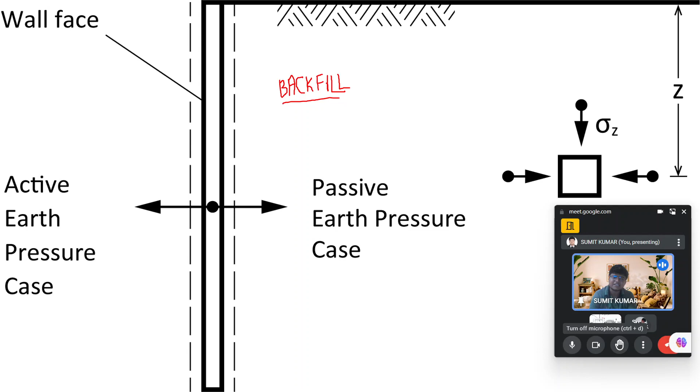This is very easy and doesn't need to be repeated, but it's a basic concept, so I think it's worth discussing again for better understanding of the subject. So these things are very simple: Sigma A equals k times sigma z minus 2c root k.

Now your question is, what is sigma z? Sigma z is the effective stress at depth z, and the effective stress concept you've read during Geotechnical Engineering 1, that is nothing but gamma times the depth of the soil.

When we are talking about effective stress, the location of the water table is also one of the most important aspects, because it will create differences in the soil that we need to deal with.

Suppose we are calculating the earth pressure at depth 6 meters from the ground floor, and the water table lies at 4 meters. In that case, when we calculate the earth pressure coefficient at 6 meters, suppose it will be 1 by 3, so the sigma z value will be multiplied in the effective term.

So we take gamma, we calculate sigma z as: suppose the unit weight above the backfill, the gamma bulk, is 18 above the water table, and below the water table, the gamma saturated will be 21. So how do we calculate this?

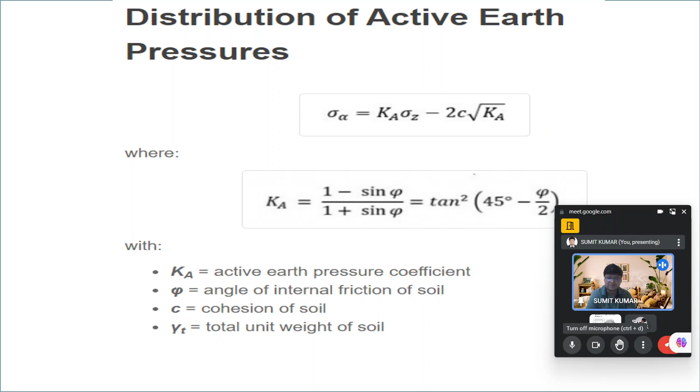Now the earth pressure coefficient I am talking about is 1 minus sin phi by 1 plus sin phi, and similarly for the passive case, 1 plus sin phi by 1 minus sin phi. That's not a big deal, it's well understood by you.

So the QS surcharge I am talking about will be mentioned here, as I have already discussed. Similarly, for the passive earth pressure, Kp times sigma z plus 2c root Kp, where Kp is 1 plus sin phi by 1 minus sin phi, which equals tan square of 45 plus phi by 2.

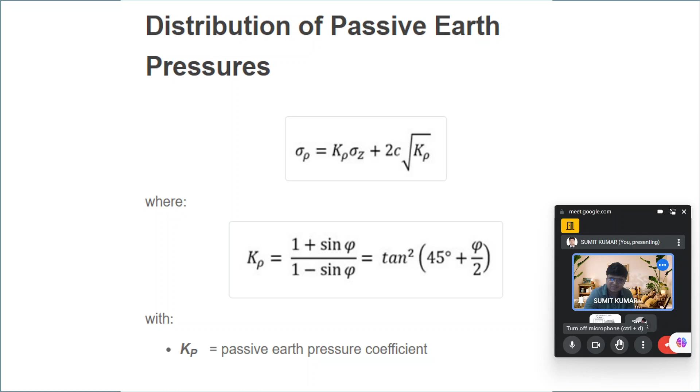When we talk about K, that is tan square of (45 minus phi/2), but that's not the only case. It can also be written as (1 minus sin phi)/(1 plus sin phi), equal to cot square (45 plus phi/2). This is purely a trigonometric result: when you solve (1 plus sin phi)/(1 minus sin phi) trigonometrically, you ultimately get tan square (45 plus phi/2), and the converse is also true.

We also covered the inclined backfill and solved a good problem where the backfill inclination beta was given, calculating the earth pressure coefficient. We still need to calculate the passive earth pressure coefficient, which will be taken up in the last session. That problem helped us understand how the backfill slope is specified and how to calculate results correctly.

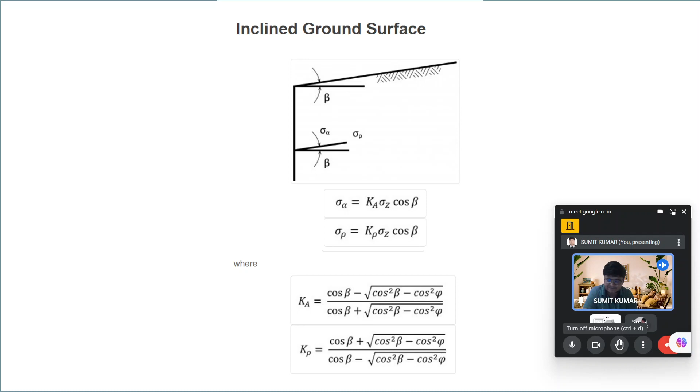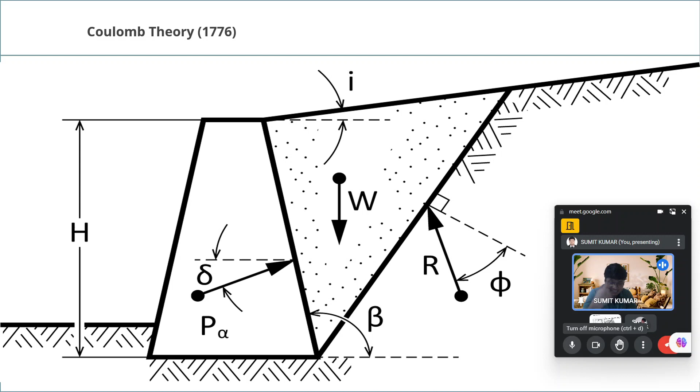In the previous class we covered Coulomb's theory, took its assumptions, and developed the interrelations showing how to calculate those values. That's as far as I want to go in revising the last class's content. That part is not of much importance for this session, so now I will move on to the new content.

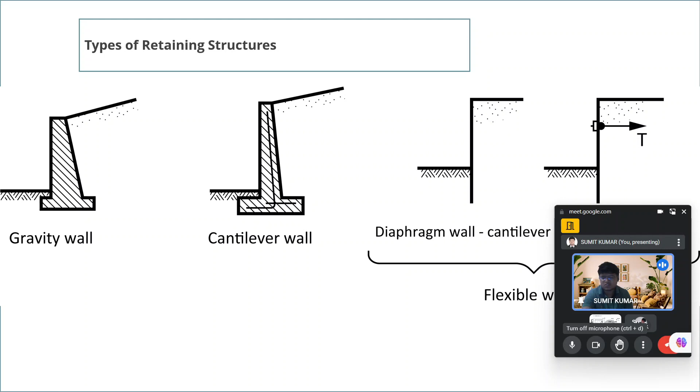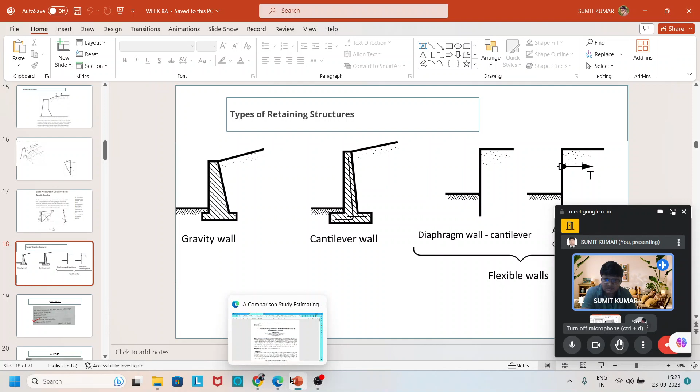For types of retaining walls, we discussed gravity, cantilever, and diaphragm walls. That concludes the revision from the last class. Now I will start with new content which will be very helpful for you from today's session. Give me a minute to share that content with you.

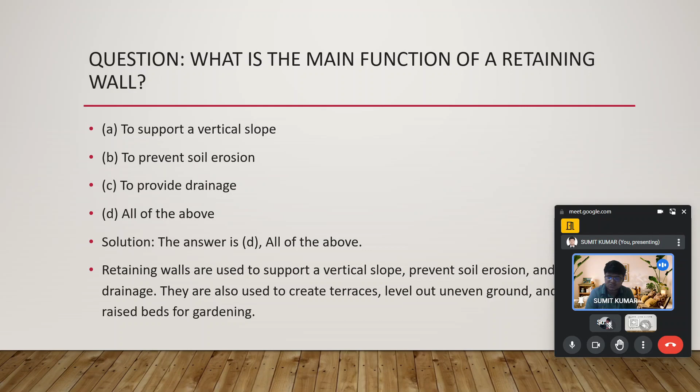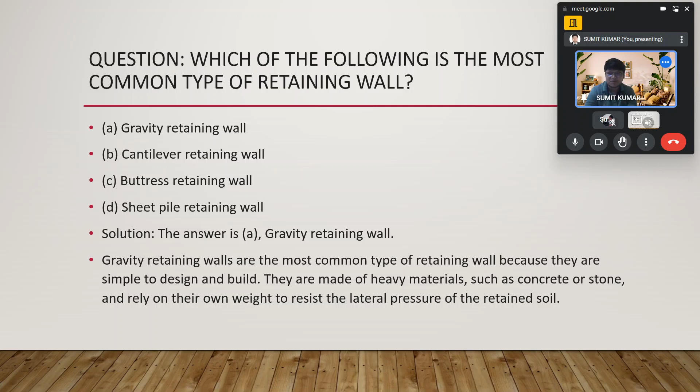Okay, so read the next question and try to answer. In the meanwhile, I will take some water.

Okay, so have you read the problem? Okay, no problem, I will read. So the question here is: what is the main function of a retaining wall? Again, the four same solution problem will be there. I think due to some technical error, the same question has been repeated.

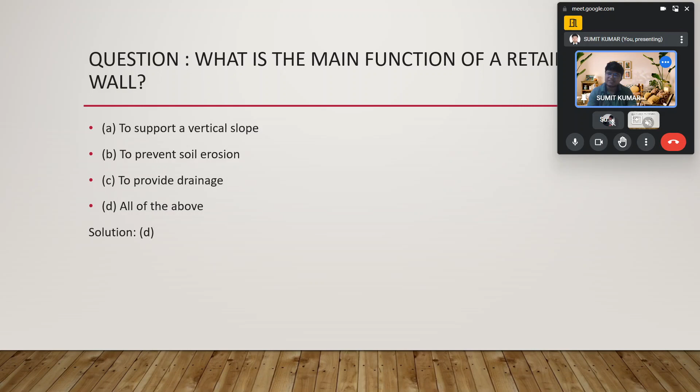So, to support the slope, to support the vertical slope, to prevent the soil erosion, and to provide the drainage - all the options given here are correct. This question already came two slides earlier, but due to some reasons it came again.

Again, which of the following is the most common type of retaining wall? Gravity retaining wall - it is only for revision. This has been repeated in a different manner.

If we are talking about that fact, then another question comes to mind: for what purpose is the retaining wall we are constructing? Are we trying to resist the soil from moving, prevent erosion, or are we storing water behind it? Because the pressure acting on a retaining wall due to soil and due to water pressure will be completely different. Those two things don't go hand in hand. So that will be well understood by you. I think that is not a concern from anyone's side.

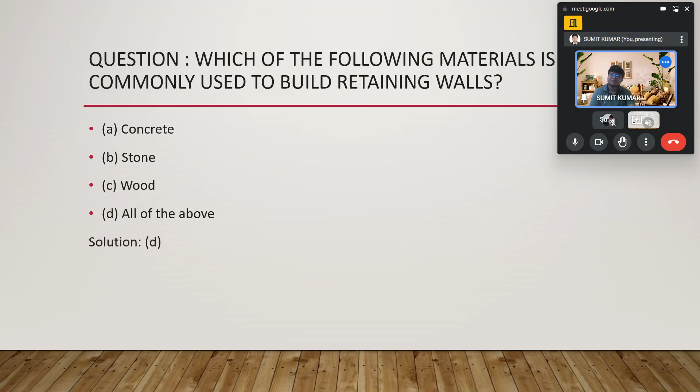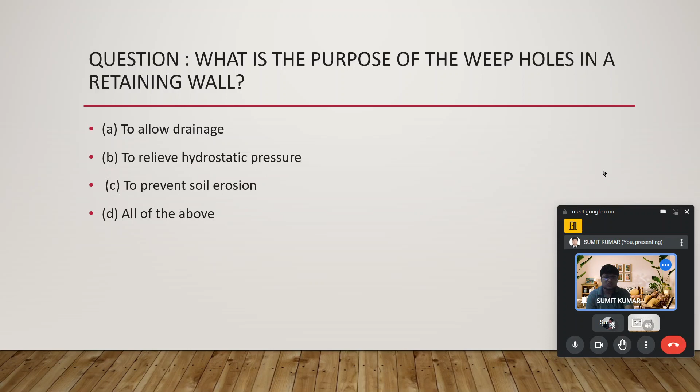Okay, moving ahead, the next question raised here is: what is the purpose of the weep hole in a retaining wall? This question is new for you, I think, since it wasn't discussed during this session. But I put some problems like this in the presentation to give you facts you may not be aware of, which you'll understand well after this. So the question is, what is the purpose of weep holes in a retaining wall? Is it to allow drainage, to relieve hydrostatic pressure, to prevent soil erosion, or all of the above?

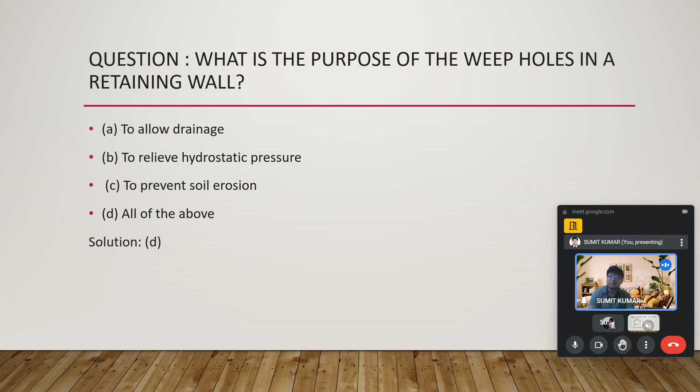To allow drainage and to relieve hydrostatic pressure go hand in hand, and preventing soil erosion is also why we provide weep holes. So the solution is yes, all the options provided are true. I actually put options that are all correct to give you a broader understanding. If only one option were correct, you'd never understand the other three. But going through this question, you'll have confidence that these are all true solutions, rather than thinking the others are incorrect. So you can answer this if the same problem is asked differently at other places. I think this will be understood well by all of you.

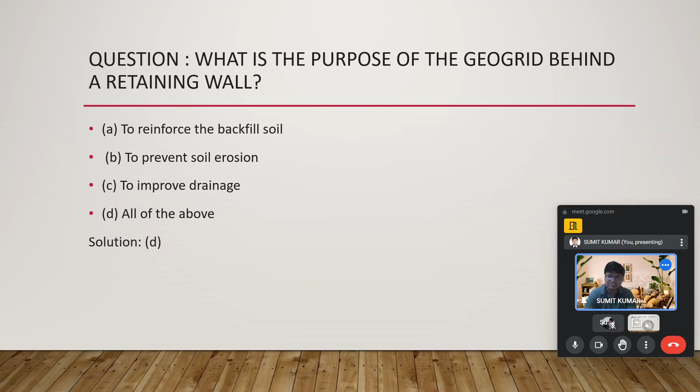Now, what's the next question? What is the most common cause of retaining wall failure? Failure does take place—it's not that once we construct a structure it never fails. But it's our duty as engineers to design structures in the most efficient way, because failure of any structure can result in a big disaster, which cannot be accepted in any way. So the design should be most appropriate, but even so, failures do take place.

If effective stress gets reduced, the strength ultimately goes downwards. That will not be good in any way, so it may lead to failure.

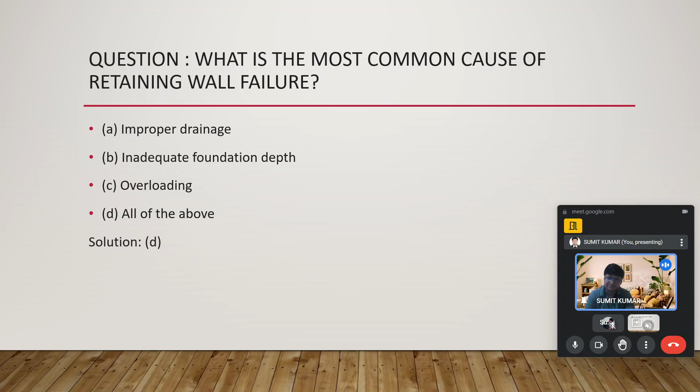So, what did you understand from this problem? The cause of failure could be improper drainage, inadequate foundation depth, and overloading. I think up to this there will be no problems with anyone. We will move ahead.

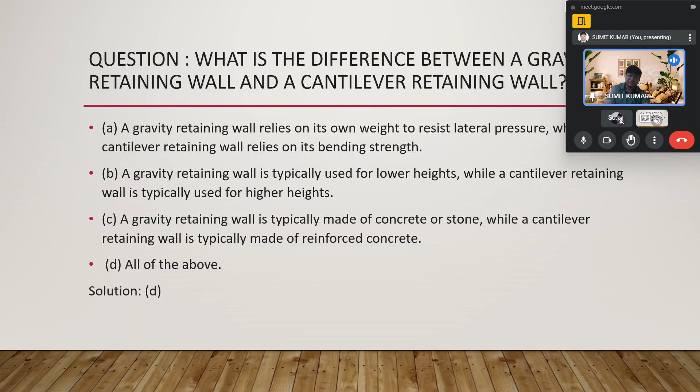So option number D is going to be our correct answer. I think the things are very much clear.

Now the next problem is in front of us: what is the difference between a buttress retaining wall and a sheet pile retaining wall.

During the starting session, you have seen all the retaining wall images, and now we are coming across its application with its name, so one can understand the fact about this.

The question is: what is the difference between a buttress retaining wall and a sheet pile retaining wall? In the last problem, we read the difference between the gravity retaining wall and cantilever retaining wall. This could be one problem. All the options are correct, so three solutions are provided.

The three differences are stated over here. Similarly, with every problem from earlier as well, the solutions are stated. All the above options are mostly correct, so three solutions are provided. Basically, three questions could be framed from the same aspects, but only one question is framed to give you more knowledge in less time.

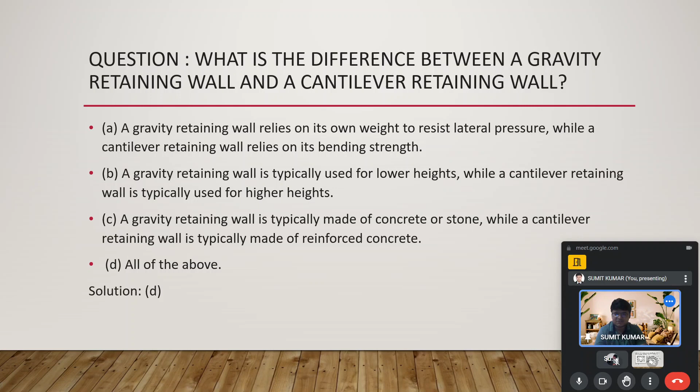So what is the difference between the buttress retaining wall and a sheet pile retaining wall? Option A: a buttress retaining wall has a vertical buttress that supports the wall, while a sheet pile retaining wall is made of interlocked metal sheets.

Exactly, it is true. A buttress retaining wall is typically used for higher heights, and a sheet pile retaining wall is typically used for lower heights.

Now, a buttress retaining wall is typically made up of concrete or stone, while a sheet pile retaining wall is typically made up of metals. So option D is going to be our correct answer.

So over here as well, you find the three differences between the buttress retaining wall and the sheet pile retaining wall. You need to understand this fact. You have to preserve this question and prepare it as a solution covering three problems. The same problem could be asked from three directions and it will ultimately state the same result. So these things you need to understand.

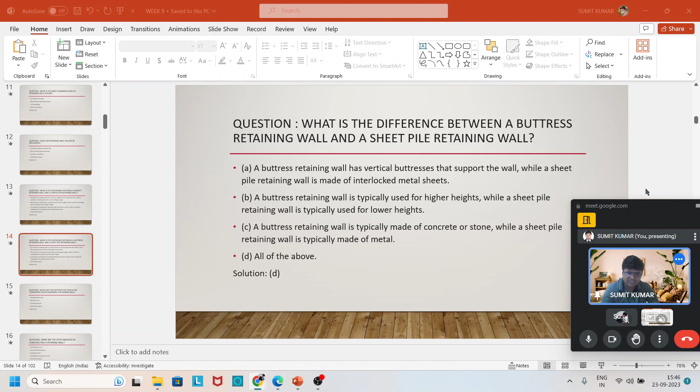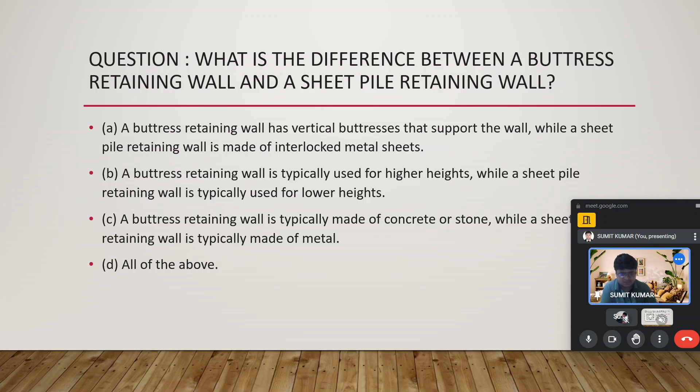Okay, so you have the solution for this problem stated. Now prepare these questions - you can write it in these notes as well as differently.

Now the question is: what are the factors that should be considered when designing a retaining wall? The height of the wall is a factor. Obviously, the type of soil, surcharge load, or all of the above are the options for this. The height of the wall is one of the most important considerations while designing a retaining wall.

Second, the type of soil is also important - whether the soil is cohesive or cohesionless, whether the soil has plasticity property. Those facts need to be reviewed.

Now the third thing is the surcharge load - the load which has been applied there during construction or before construction, or the superstructure load which will be coming over there throughout the region. So all those factors become the most important considerations during the design of a retaining wall.

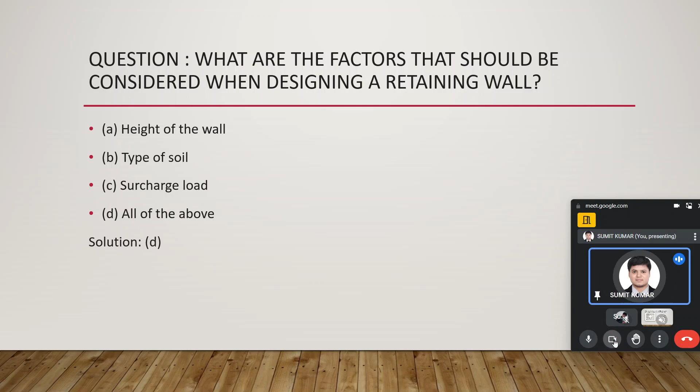Now we come to the next question. The next question is: what are the types of maintenance that should be performed on a retaining wall? This could be asked in a different manner as well, but what should be the correct answer?

Inspecting the wall for cracks and other damage, repairing any damage that is found, cleaning and removing debris from the wall - all of the above. So what are the types of maintenance? Inspecting the wall for cracks and other damage, I think so.

Repairing any damage that is found is obviously one of the most important aspects, along with cleaning and removing debris from the wall, for the maintenance of the retaining wall at any workplace.

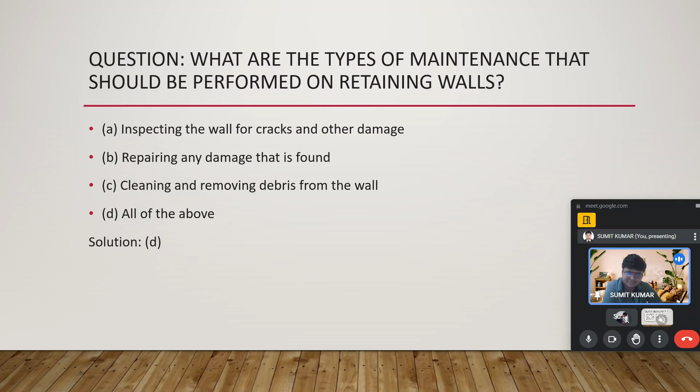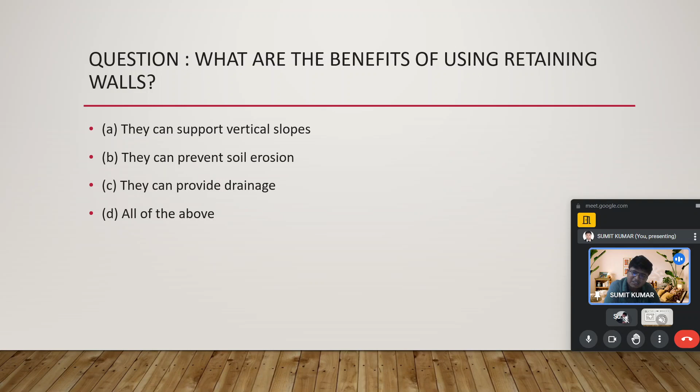So we have ended up with the questions, the simple theoretical questions. Now we will go with some numerical problems, very simple small numerical problems, and afterward hopefully we could understand the sheet pile wall up to an extent during today's session only.

So the question is: a retaining wall is 3 meter high and retains soil with a unit weight of 19 kilonewton per meter cube, and the angle of internal friction has been given as 30 degrees. So what will be the active earth pressure on the wall, in kilonewton per meter square?

So phi is 30 degrees already given, the value of K is going to be 1 by 3, and the question is asking for the active earth pressure on the wall. The solution is calculated using the Rankine equation, and PA is going to be 1 by 2 into gamma into h square into K, which we usually write as 1 by 2 into K into gamma h square.

So the value of K is 1 minus sin phi by 1 plus sin phi, and PA is the active earth pressure in kilonewton per meter square, similarly gamma is in kilonewton per meter cube, where the height of the wall is h meters, and the active earth pressure coefficient is K, that is the coefficient of active earth pressure.

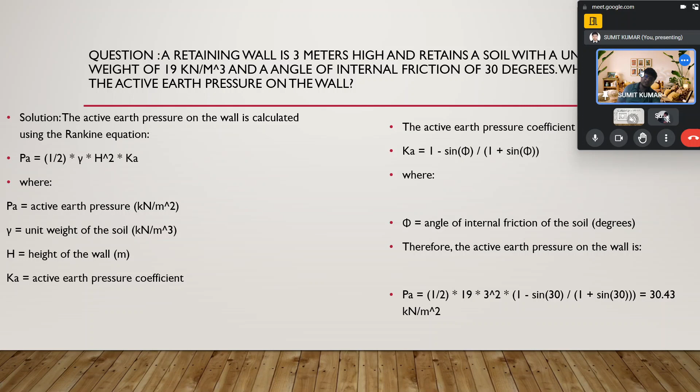So in the solution we have solved the problem and reached the conclusion that the active earth pressure is 30.43 kilonewton per meter square.

Now the second part of the problem: a sheet pile wall is 4 meter high and retains soil with a unit weight of 20 kilonewton per meter cube, and the angle of internal friction is 35 degrees. Find the passive earth pressure on the wall, which is calculated using the Rankine equation.

So PP is given as 1 by 2 into gamma into h square into Kp, and the passive earth pressure coefficient is 1 plus sin phi by 1 minus sin phi, where phi is the angle of internal friction of the soil. Therefore the passive earth pressure on the wall, PP, equals 1 by 2 into 20 into 4 square into 1 plus sin 35 by 1 minus sin 35, equals 72.1 kilonewton per meter square of pressure.

I think there will be no confusion up to this in anyone's mind.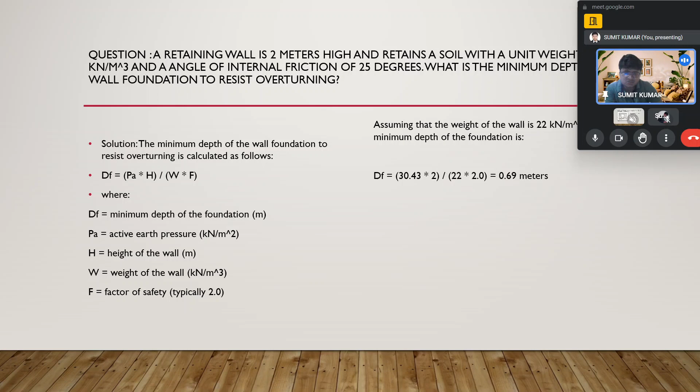The solution to this problem is dF equal to PA into H by W into F, where PA is the active earth pressure, W is the weight, and F is the factor of safety. During this calculation we are able to calculate dF. So assuming the unit weight at 22, the minimum depth has been found at 30.43 into 2 by 22 into 2, and we reach the value of 0.69 meter in this case.

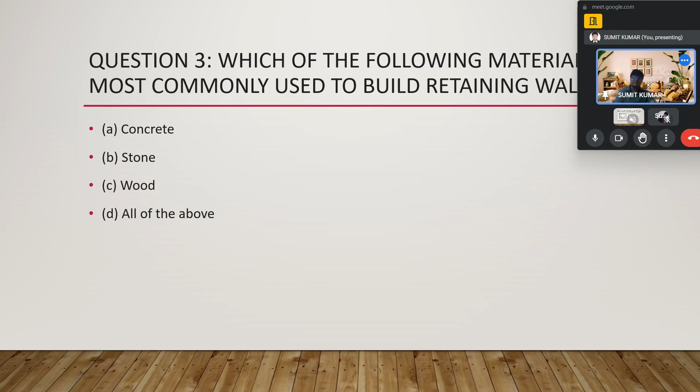Question number three has been repeated here: which of the following materials could be used to build the retaining wall? Option D is the correct answer - concrete, stone, wood, and so all of the above will be the correct answer.

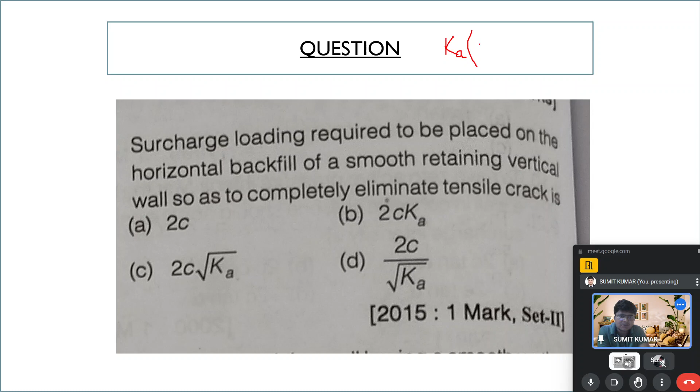Now I think there is no problem in this understanding. K gamma z plus q - because the surcharge will be multiplied with the earth pressure coefficient, as discussed at the start of today's class - minus 2c root k, minus 2c root k. This should be equal to 0.

So solving this, what we get is this will be going to be 0, because at z equal to 0, this term is going to be 0. So q will be 2c by root k. Q equal to 2c by root k. So option number D is going to be our answer - q is going to be 2c by root k. I think there will be no confusion or doubt up to this point.

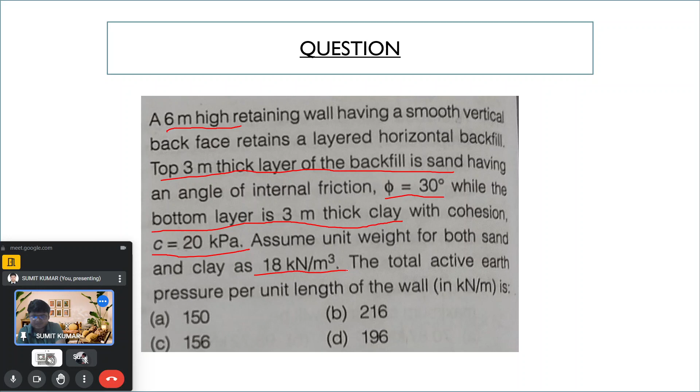In this question, first the earth pressure diagram has been drawn, and then its area has been calculated. I will explain these things to you.

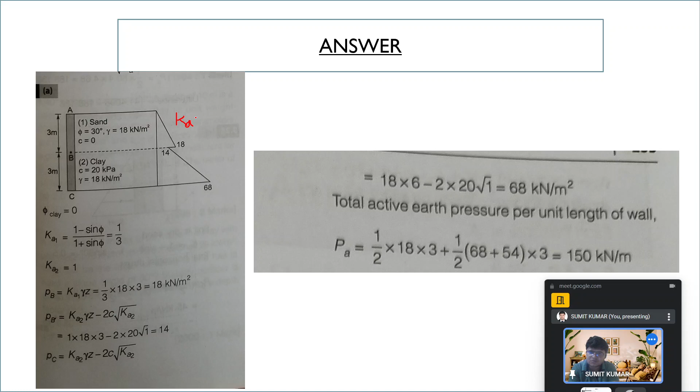For the first 3 meters, sand is there with phi equal to 30 degrees, gamma equal to 18 kilonewton per meter cube, and C equal to 0. So for this section K1 is 1 by 3, and it has also been calculated that K2 is 1 by 1.

The value of PB is K gamma Z, which comes out to 18 kilonewton per meter square. After that, for PB, K2 into gamma Z minus 2C root K2 has been calculated as 14. After that, PC has been calculated and found as 68 kilonewton per meter square.

Afterward, the area of the earth pressure diagram has been found, so we reach the answer. This is the area of the earth pressure diagram, I'll write it here so you understand it later as well, as you go through the PDF. You just have to understand this concept.

You have to understand only this thing, that if a question asks to find total earth pressure per meter or anything like that, it means we have to calculate the area of the earth pressure diagram, which we have already drawn and understood how to draw during the last session. We have taken many questions on this.

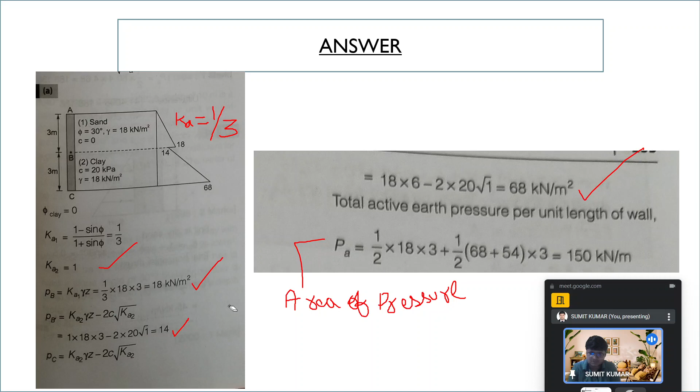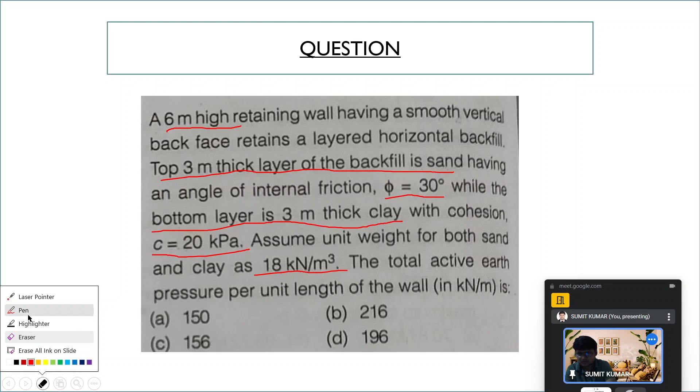Now a question is asking about a vertical cut to be made in a soil mass. In the previous problem, one thing was not cleared - the answer for that problem is 150, and the solution needs to be mentioned. So this option is the correct option.

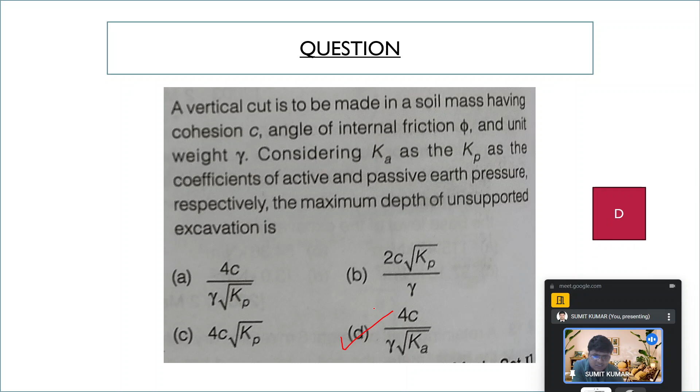Option D is already mentioned over here, so this thing will be very much clear for everyone.

Now see this problem, this is one of the very good problems. First of all we will read the question, and I will explain what mistake people commit while solving this problem.

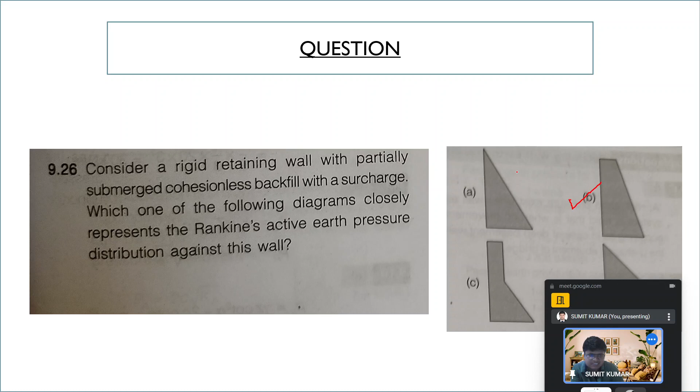The surcharge is there, so this surcharge will ultimately result in the formation of, as you write, k into gamma z plus q. For z equal to 0, k into q is there, so that k into q will be formed, and afterward k into q plus gamma z from z equal to 0 to z equal to h, the linear variation takes place. So the diagram plotted in option B is the correct answer for this problem.

Everything is well and good, and understanding is properly clear. Now, a question: a rigid, smooth retaining wall of height 7 meters with a vertical backface retained saturated clay as backfill. The saturated unit weight and undrained cohesion has been mentioned, saturated unit weight is also mentioned, and the cohesion is also mentioned as 20.

Now the difference in the active lateral forces on the wall, in kilonewton per meter length of the wall in decimal places, before and after the occurrence of tension crack - if asking about before the occurrence of tension crack, the section above ZC, that is 2C by gamma root K, is not neglected, but afterward it has been neglected. So the difference will be of the 2C by gamma root K that has changed.

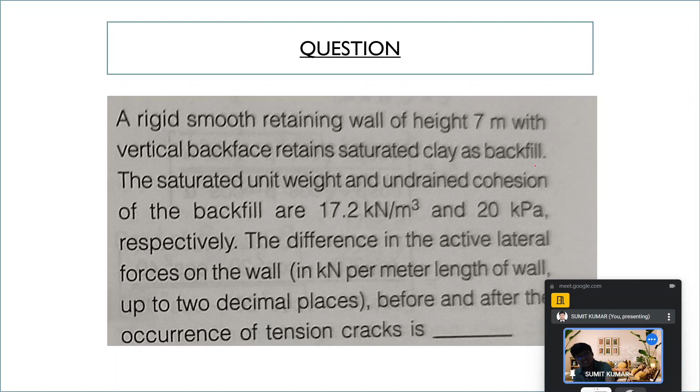For this problem, first of all minus 2c root k is there, then 2c by gamma root k is the zc, and 2zc, 2c by gamma root k - it has been asking in kilonewton per meter. So earlier the stress diagram has been plotted, and the difference of the shaded region to the unshaded region is the solution of our problem. So the answer for this question is 46.7262, and this is how you will understand this fact.

I will explain once more. I think it has been understood by you, but I will explain for consideration - some people might be unaware of this fact, so I will discuss it for those people. If you feel it is not needed for you, otherwise there will be no problem from my side.

First of all, the 7 meter height has been given, so we have to find the value of ZC as 2C by gamma root K. If you find 2C by gamma root K, it comes to 2.32. And if tension cracks get developed, the section above 2C by gamma root K - specifically the distance from the soil surface to 2C by gamma root K - the stress diagram is not plotted, it is zero, and it has been started from the depth of 2C by gamma root K up to the bottom, up to 7 meters.

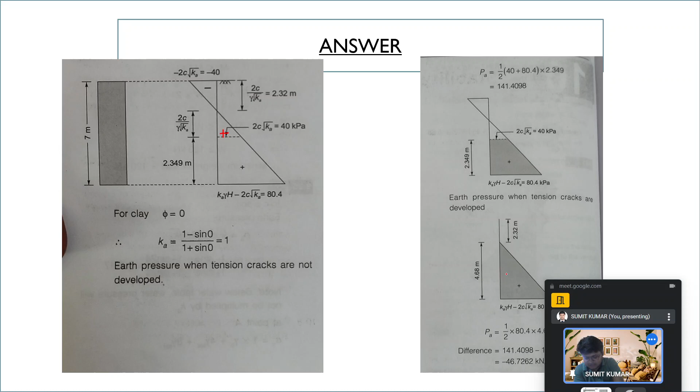Now, if we compare this picture with that picture, I think so. The cursor is visible now. Okay, listen.

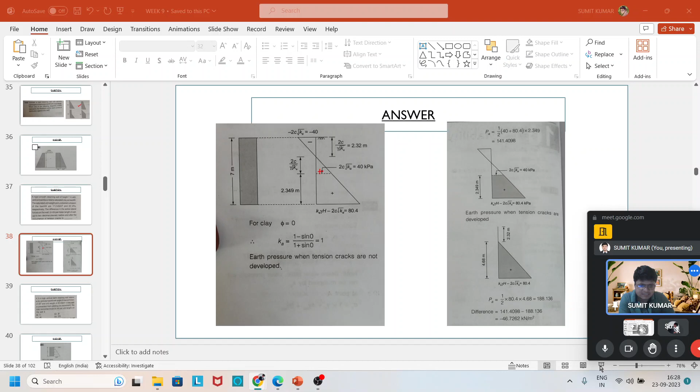Allow me to check whether the cursor is visible. Yes, it is visible. The difference in area between those two pictures is this portion only. So if we are able to find this area only, we are able to answer the difference.

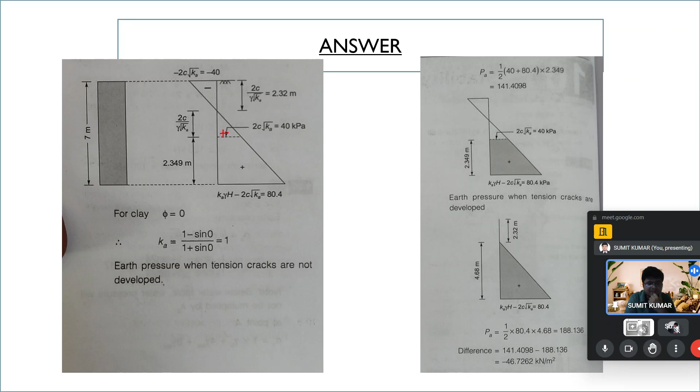A different consideration has been taken to calculate that area, but in my opinion, if we find 1 by 2 into 2c root k into 2c by gamma root k, the answer will be 46.7262 kilonewton per meter square, which is the difference asked for. I think there will be no confusion in anyone's mind up to this. If there is, anyone can ask at any point of time.

Now we move to the last problem for the earth pressure theory. Specifically, we can take some more problems if needed, but I think that much will be more than sufficient.

So the question is: a 3 meter high vertical earth retaining wall retains a dry granular backfill with angle of internal friction at 30 degree and unit weight at 20 kilonewton per meter cube. If the wall is prevented from yielding, no movement, find the total horizontal thrust in kilonewton per unit length of the wall.

So a 3 meter wall has been given and earth pressure at rest has been specified. First of all, you find k as 1 minus sine 30, and after that you find 1 by 2 into k into gamma z square, and with that you...

I think there is some noise over there, okay give me a minute. Hello, am I audible? Yes. Okay, no problem. Sometimes the network issue arises, so a little interruption of a minute takes place. It's not an issue, okay.

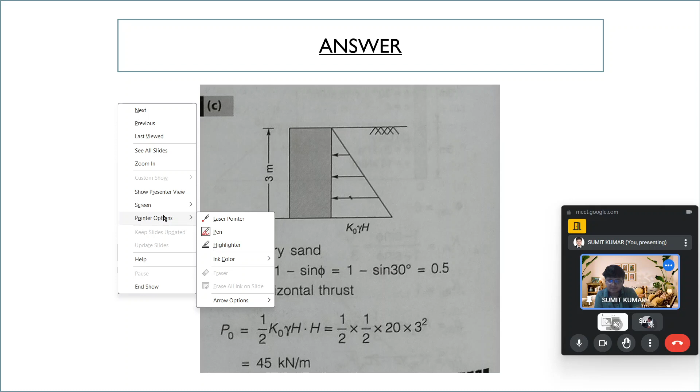I think there will be no problem. Now we will move to the next part. Now we come across the sheet pile wall. When we take into account the sheet pile wall, one thing needs to be understood, and that understanding is very much necessary for one and all, because the sheet pile is also used specifically offshore to prevent failure.

Up to the earth pressure theory, what we have studied is basically the basic concept of geotechnical engineering. This understanding we need to develop through our study, but now we have to move to some broader aspects. When we talk about broader aspects, what do we mean? Specifically some different applications.

When we read the sheet pile wall, afterward we will study it in cohesive soil, cohesionless soil, and different conditions created for those cases. So we will move into that, but before that, first we understand the sheet pile wall in geotechnical engineering, its applications, and its implementation results - what advantages, what disadvantages, what problems associated with it will be taken care of. After that we will move ahead into deeper facts for these problems.

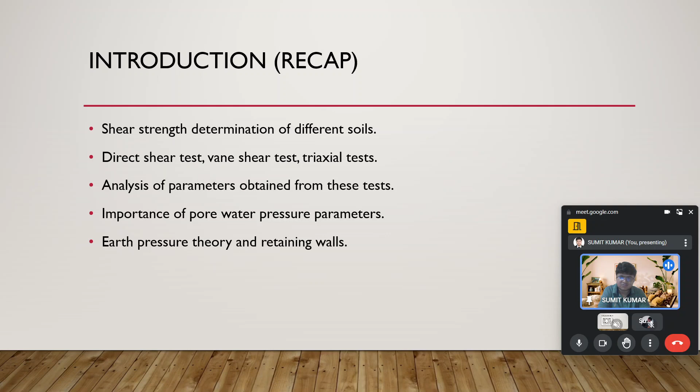A sheet pile wall is basically a vertical barrier made up of interlocking steel or concrete sheets. Here steel sheets have been shown, but concrete sheets could also be used, which would be heavier. These are driven into the ground to provide support for excavation or to prevent soil erosion.

They are commonly used in construction and civil engineering projects. We could see it in day-to-day projects at different places wherever needed. So sheet piles have become very important.

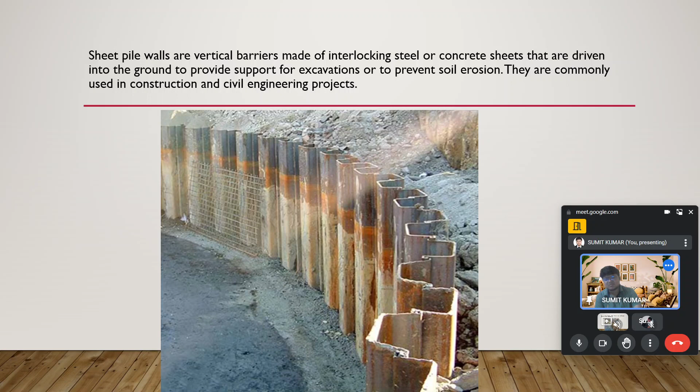Now, what materials are used for sheet pile retaining walls? They can be constructed using materials such as steel, concrete, or timber. As I said earlier, the material of construction depends on the type of application we want to implement. If we want to sustain light loads, timber works well; otherwise steel or concrete is needed. Depending on durability and need, different materials can be used for different types of sheet pile walls.

Steel sheet piles are the most commonly used type of sheet pile wall due to their strength, durability, and versatility. If we use a steel sheet pile wall, once the work is done, we can remove it if needed—it has recycle value. Apart from that, concrete or timber sheet pile walls are used, but they are so heavy that this creates a problem.

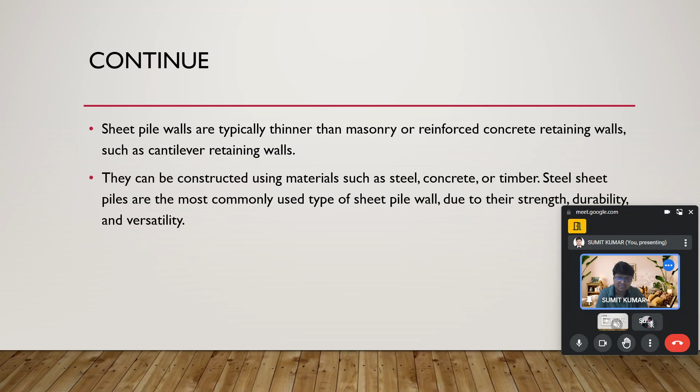Now, sheet pile walls are used widely for a variety of applications. We are talking about applications, and we'll also see different uses. So what are the applications where sheet pile walls have been used?

First, retaining walls—sheet pile walls can be used to retain soil and prevent landslides, especially in areas with steep slopes or unstable soil conditions. When studying shear strength, we saw several images of landslides resulting in severe damage. You may have seen images on social media of whole sections falling down rapidly on sloped ground during the rainy season, leading to damage of life and property across the globe. Sheet pile walls somehow serve the purpose of preventing failure due to landslides in those regions.

Apart from that, coffer dams—sheet pile walls are often used to create cofferdams, which are temporary enclosures that allow construction to take place below the water level. This is a temporary structure. But the retaining wall we studied before is not temporary; it can be a permanent structure where the sheet pile wall is constructed to reduce the chances of erosion across that section.

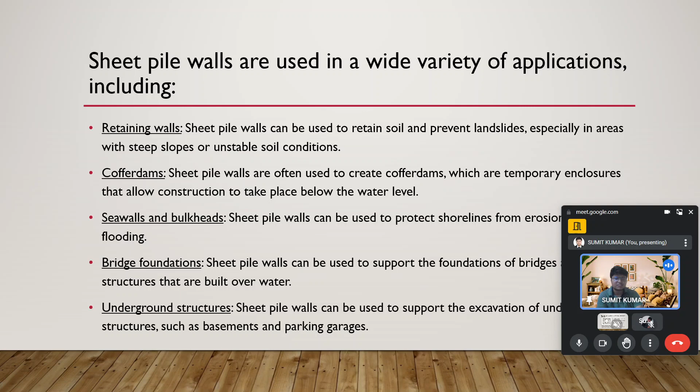Sheet pile walls can be used to protect the seashore. You have come across these terms many times. Seawalls or bulkheads have been constructed because waves of the sea, especially near full moon days, become very high and hit the soil. So no erosion takes place from that location, and the strength designed during earlier times is maintained. The sea wall and bulkheads serve the purpose of protecting the shoreline from erosion and flooding at the same time.

Now, bridge foundations. The sheet pile wall can be used to support the foundation of bridges and other structures built over water. For bridge foundations, the sheet pile serves the purpose because construction of bridges or formation of the foundation involves too much depth. So the sheet pile wall sometimes serves the purpose to create and remove water from that place, for easy construction at that section.

Now one of the other places of application is underground structures. The sheet pile wall can be used to support excavation of underground structures such as basements and parking garages. During construction, to protect workers, sometimes a wall needs to be created in case something unhappening occurs. This wall tries to prevent workers from getting dumped into those sections, so it becomes very important and acts as a preventive measure for construction workers working in excavation for basements or parking garages.

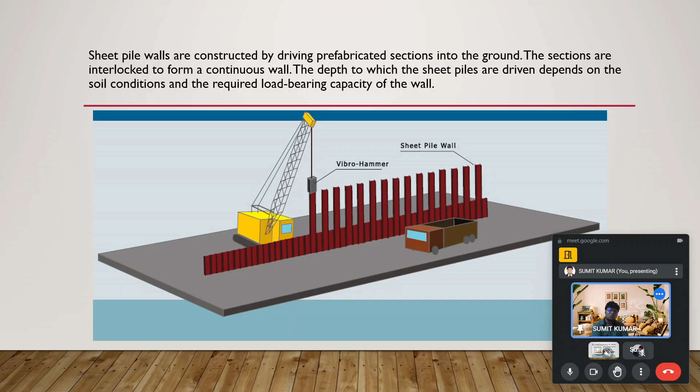Now, sheet pile walls are constructed by driving. Here a schematic diagram has also been shown. It is constructed by driving prefabricated sections into the ground. The sections are interlocked to form a continuous wall, and the depth to which the sheet pile wall is driven depends on the soil conditions and the required load bearing capacity of the wall. You see how this wall has been inserted into the soil from this diagram. The sheet pile wall is shown along with the vibro hammer used to implement the wall within the soil section. This 3D schematic diagram gives a better idea of how this actually takes place in the field.

Now, the sheet pile wall offers a number of advantages over other types of retaining walls. It provides several advantages with no problem for certain purposes, so only another consideration is required. People think of other applications once they feel it's difficult, so a more economical or easier technique needs to be developed that solves the problem in one minute instead of taking many days. That's why we try to find the solution. So the sheet pile offers different advantages, which we'll go across one by one.

First is strength and durability. Sheet pile walls have strength and are long lasting, whether made of steel or concrete. They have a very strong, durable life and can withstand high loads and harsh environmental conditions.

Next is flexibility: sheet pile walls can be constructed into a variety of shapes and sizes, making them suitable for a wide range of applications. Speed of construction: sheet pile walls can be constructed relatively quickly compared to other types of retaining walls. Water tightness: sheet pile walls can be made watertight, making them ideal for use in applications where water exclusion is important.

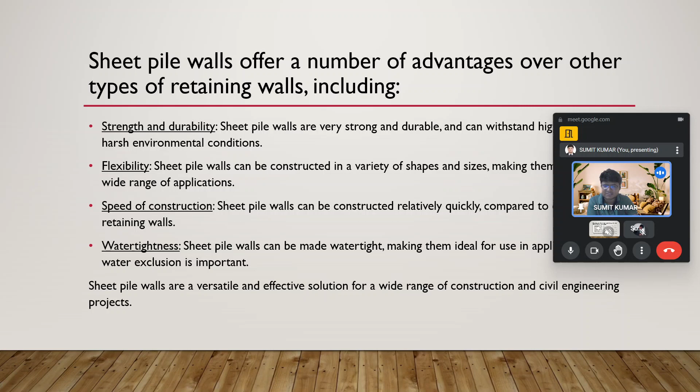Now we again go for introduction. In this introduction, we again redefine this sheet pile wall, retaining wall. So the sheet pile walls are retaining walls constructed to retain the earth, water, or any other material. These walls are thinner in section as compared to the masonry wall, and the sheet pile wall consists of a series of sheet piles driven side by side into the ground, thus forming a continuous vertical wall for the purpose of retaining an earthwork.

You have seen these things earlier in the images. A hammer is trying to insert the pile wall inside the soil in order to serve the purpose for which it is implemented. The walls are thinner in section compared to the masonry wall; obviously, if it is not thinner, it will become heavy. So there is another consideration of bending or other effects that come into picture which result in problems for those sections.

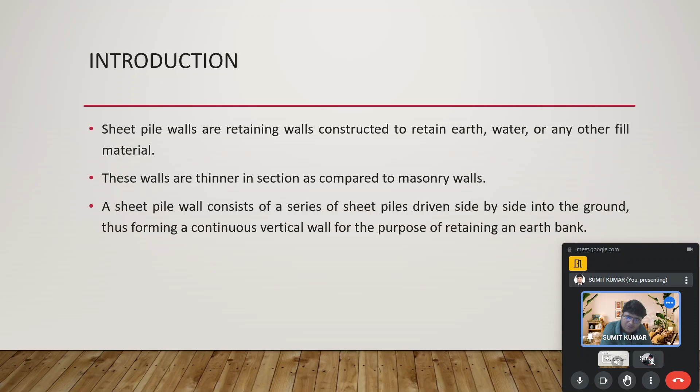Now, the sheet pile wall consists of a series of sheet piles driven side by side, forming a continuous vertical wall for the purpose of retaining an earth bank. The sheet pile walls are a type of retaining wall commonly used in civil engineering and construction projects.

So they are designed to provide structural support and to retain soil or water on one side while allowing excavation or development on the other side. We have seen several aspects of this. The sheet pile wall is implemented, inserted, and at one place excavation takes place while at other places construction takes place at the same point. So it will also reduce the time of the project, and in a way it will try to reduce the construction cost of the project because cost is directly related to time in one way or another.

Here is some other information for the sheet pile wall, like the construction materials. The sheet pile walls are typically made of steel, but they can also be constructed from other materials like vinyl or concrete. We have also seen earlier that wood could serve the purpose at some places, but it solely depends on the amount of strength needed or the purpose of work, which is equally important while using these sheet pile walls at a specific location.

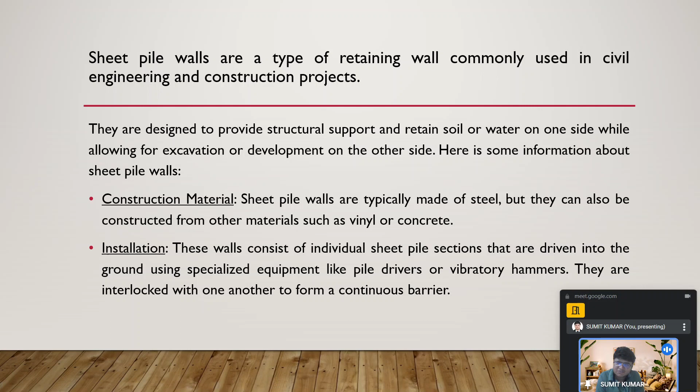Now, what is the installation? These walls consist of individual sheet pile sections that are driven into the ground using specialized equipment like a pile driver or a vibratory hammer. We have seen this in the image as well. So they are interlocked with one another to form a continuous barrier.

Now, there are various types of sheet pile walls also, like the Z type, U type, L type, and flat sheet piles. The Z type resembles the letter Z, that's why it is called Z type, and these are commonly used in both temporary and permanent applications, depending upon the need of the people.

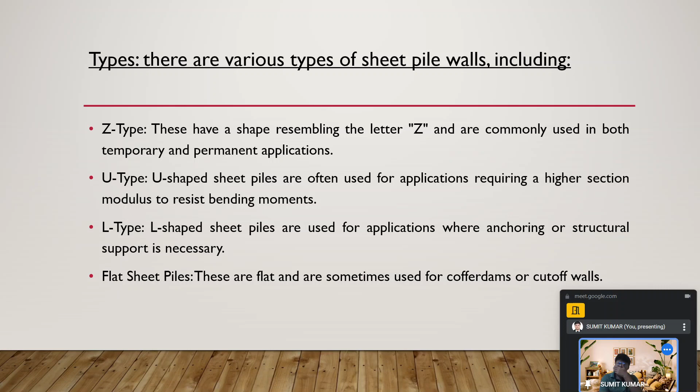Now the second is the U-shaped type sheet pile wall. These are often used for applications requiring a higher section modulus to resist bending moment. The L type sheet pile walls are used for applications where anchoring or structural support is necessary. The flat sheet pile walls are sometimes used for cofferdams or cut-off walls. So this is the consideration of the different types of sections that could be used.

Now, see the applications. We already read about the applications, but again we are taking the application and usage into our consideration. So, the application like flood control: sheet pile walls have the application of reducing the chances of flood or controlling the flood up to an extent. So they can be used to create flood defenses and levees to prevent water from inundating an area.

Now the marine structures: sheet piles are commonly used in the construction of sea walls, bulkheads, and quay walls.

In marine structures, this is the application. For the foundation support, they are used to support the excavation work and stabilize the surrounding soil during construction. This has been observed by you on a day-to-day basis because this is a basic thing which could be come across on a regular basis if you have the willingness to see that.

The next one is foundation support. They are used to support the excavation work and stabilize the surrounding soil during construction. And the next one is going to be the retaining wall. The sheet pile wall can serve as the retaining wall to prevent the soil or the water from eroding or collapsing in a true sense.

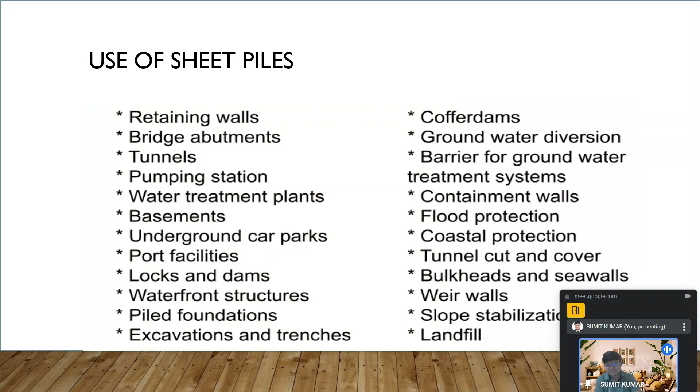And apart from that, the tunnel cut and cover, bulkheads and sea walls, weir walls, slope stabilizations, and in landfill locations also, the sheet pile wall application has been widely seen.

Now, some more advantages which we came across with the sheet pile wall include their versatility, ease of installation, and cost effectiveness compared to alternative retaining wall methods. And environmental consideration - when we come across the choice of material and construction method for sheet pile walls, it can have environmental implications, and efforts are often made to minimize their impact on the ecosystem and aquatic life.

When you talk about maintenance, proper maintenance is essential to ensure the long-term stability and effectiveness of the sheet pile walls, especially in the marine environment, where corrosion can be a concern.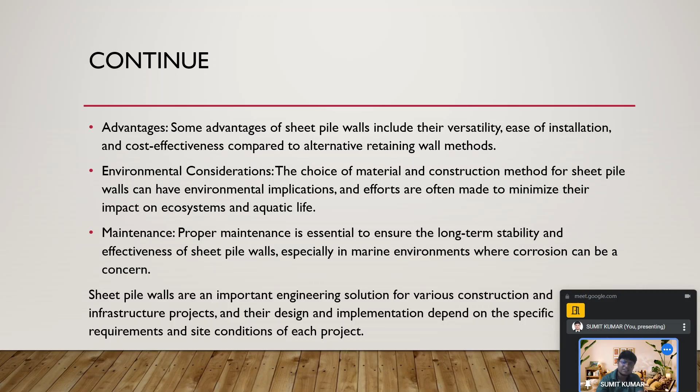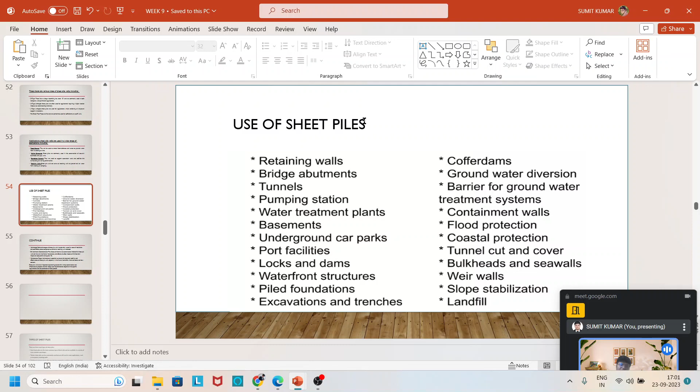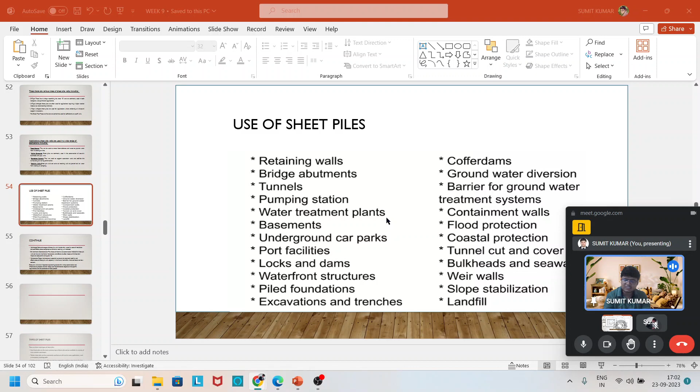Now, sheet pile walls are an important engineering solution for various construction and infrastructure projects. Their design and implementation depend on the specific requirement and site condition of each project as well. So it has been seen that it serves the purpose at different places - we have seen its usage at many number of places. But wherever we are using this, it needs to be very much clear in our mind whether its application and implementation could be in the right direction. It is not like that wherever not needed we provide it, because it will also result in increasing the cost in one way or the other.

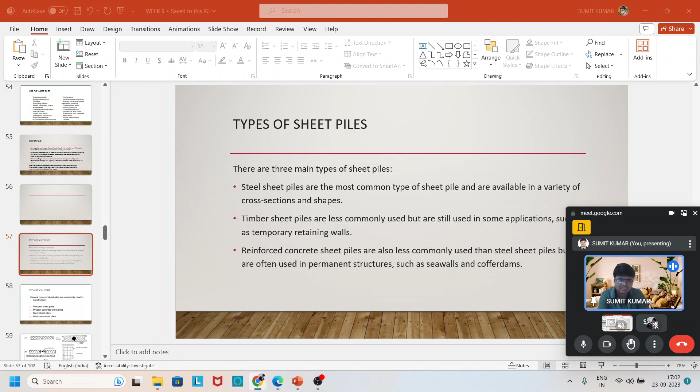Okay, so the types of sheet piles. There are mainly three types of sheet piles. The steel sheet piles are the most commonly used type. We have seen steel - we have seen different materials could be used for the construction, but primarily, three types of sheet piles are there.

The steel sheet piles are the most common type and are available in a variety of cross sections and shapes. Timber sheet piles are less commonly used but still applied in some cases such as temporary retaining walls. The third type is reinforced concrete sheet piles, also less commonly used than steel, but often used in permanent structures such as seawalls and coffer dams.

One needs to understand that different types of sheet piles made of different materials exist, but steel sheet piles are the most common type. The other two types could also be used in applications where temporary retaining structures need to be constructed, but steel sheet pile walls remain the most commonly used.

Reinforced concrete sheet pile walls are very less commonly used. Why? Because they are heavy, and since they form permanent structures, the deformation and other considerations required are not fulfilled with them. So these are only used at specific locations where provided.

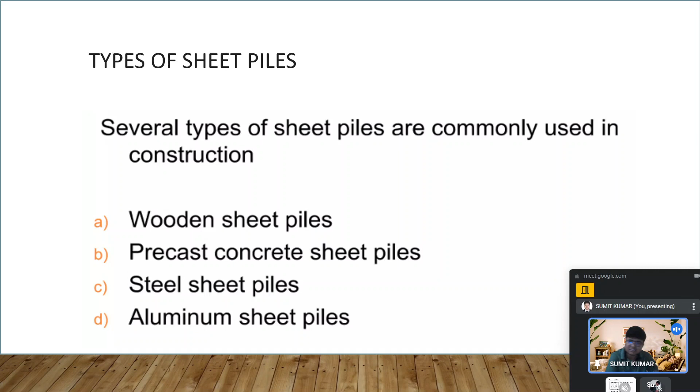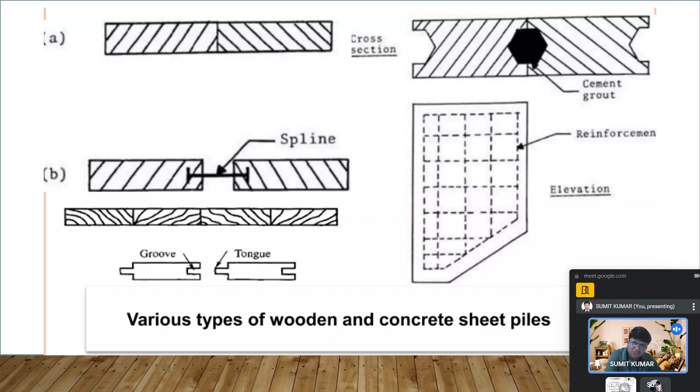You see over here the various types of wood and concrete sheet piles, how the sheet piles are jointly constructed, the splines, cross sections, elevations, and the reinforcement shown to you in the type of sheet pile walls.

So up to this, I will sum up today's session, and from the next session we will go ahead in our consideration and understand the facts about the study.

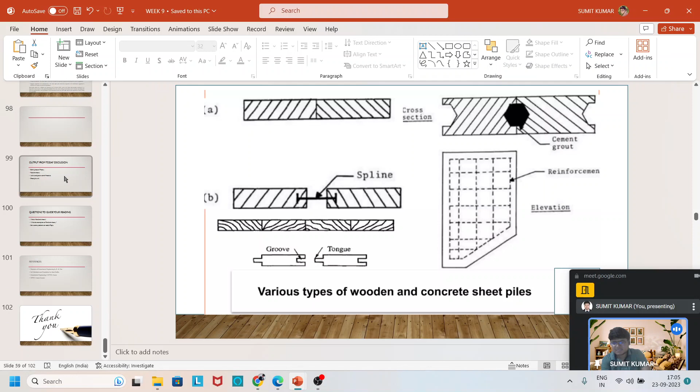Before closing the session, I will sum up what we have understood from today's session - that is one of the important aspects as output from today's session. The output which we have obtained about the Earth pressure theory and what we have studied in the past, we have discussed, taking into account the basic understanding developed during the course up to this time.

Afterward, the Rankine theory and Coulomb theory were discussed in brief. In Rankine theory, the active earth pressure, passive earth pressure, and earth pressure at rest. Questions have been solved today, and the sheet pile wall's basic understanding, introduction, the types of materials that could be used, its significance, and its application have been discussed.

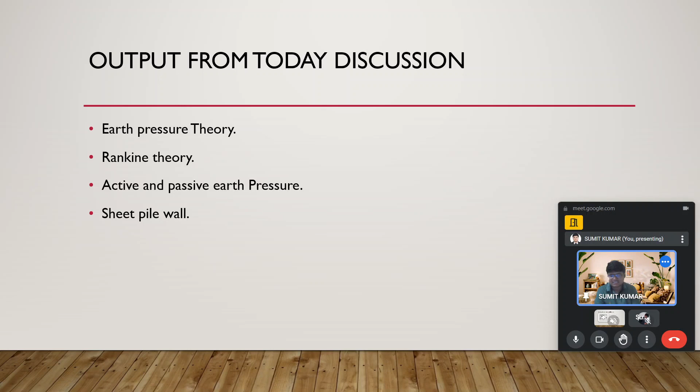Its advantages and disadvantages will be discussed in the next class. There you will come to know how useful it is. Up to this time, whatever we have read about sheet pile walls, you must have developed the idea that it is going to be one of the most significant structures used in day-to-day life by civil engineers, which will ease the construction process at different locations.

Now, the question I again keep from last time is on Rankine theory and its assumptions. Apart from that, add two more questions on Coulomb theory and its assumptions. Afterward, you need to solve all the problems discussed today or in earlier classes. That should be enough, but I suggest solving more problems from the textbooks or reference books mentioned in the introduction class of this coursework.

That will help you build better concepts regarding the same. I suggest you go through these two books also, as they contain many questions on this topic, which will be helpful for broader understanding. If any doubts remain, you can come to me and ask during class time. I will be happy to help you.